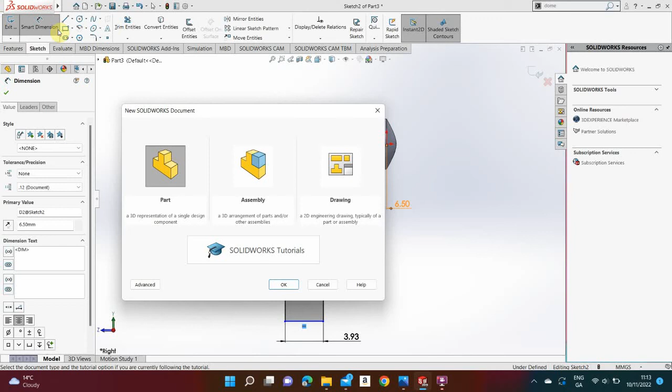Okay, so you're very welcome to this video. What we're going to be making here is the final few parts for the outside of the Newgate clock.

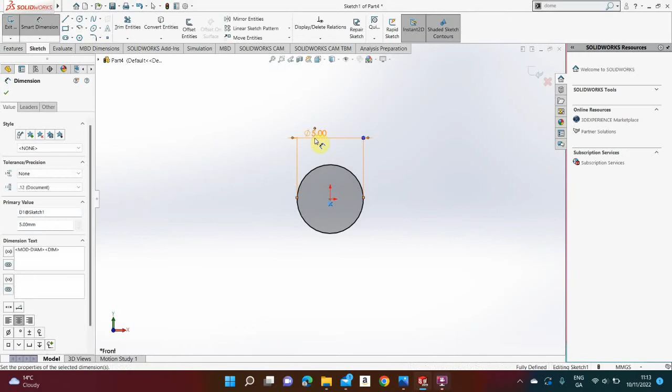I'm in a new part file here. I'm going to go to the front plane, right click front plane, click sketch, go to circle, click the origin, and draw a circle that is 5 millimeters in diameter. I go features, extrude boss base, and change it from 10 to 14.

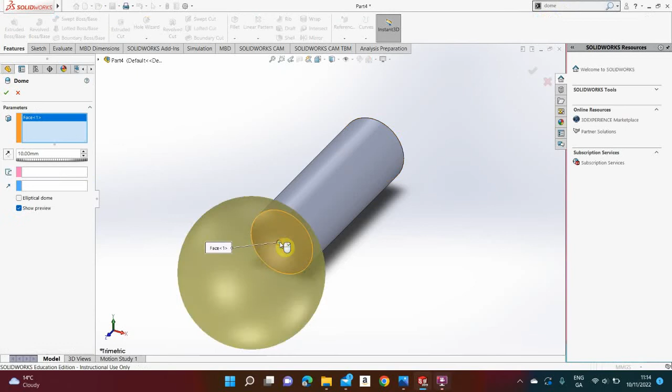So what we're making here is the hammer that hits the bells on the clock. I go to the drop down arrow at the top right, go to commands, type in dome, then click dome. I click this end here, that end there, and change from 10 to 2. That makes the hammer on the end, and I click the green tick.

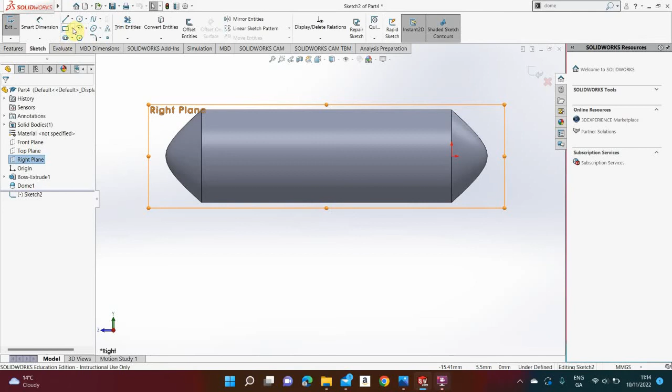Next thing to do is to make the spine that comes down from the hammer. I right click right plane, click sketch, hit the space bar, click normal to. I go to sketch, click the drop down arrow, go to corner rectangle, and draw it anywhere, I like on the left hand side. I smart dimension the width as 1 and the length as 22.

And we need to get this into the middle. So 14 take away 1 is 13, so it should be in at 6.5. Now I could be wrong with that, but there's a faster way of doing it.

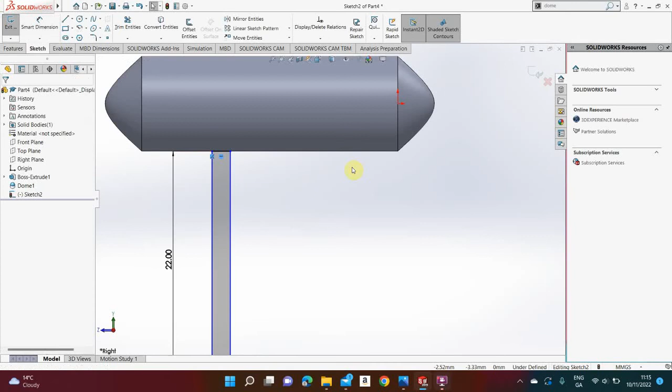I'm just going to push escape on my keyboard, right click this line here, so I'm going to pick up the center dot, and I should be able to move that by catching it and dragging it. There we go. Then I go to smart dimension, click the origin, click this line here, and we should have that at 6.5. Click the green tick. So it's in the middle.

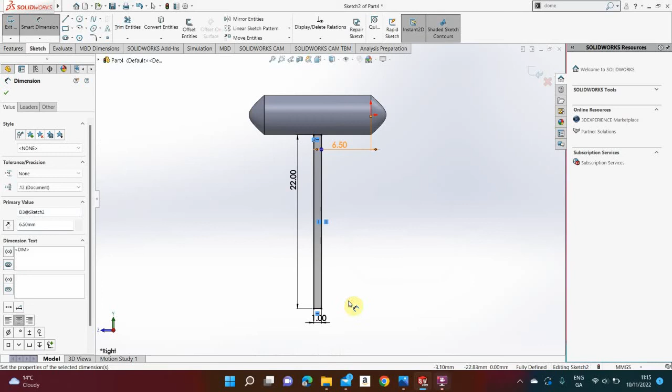I then go features, extrude boss base. Now that's going the wrong direction, so I change it from blind to mid plane, and change it from 14 to 5. Click the green tick again.

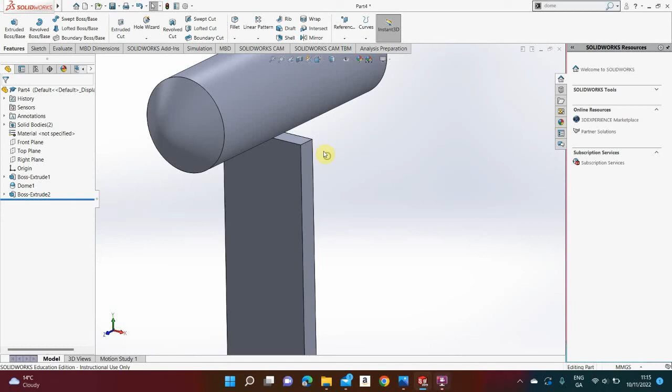And then the last step is we need to merge this onto this. So the easiest way to do that is right click here, click sketch, then click convert entities, then go features, extrude boss base, and we're not going to go up all the way, we're just going to go up exactly what's here, which is 5. Click the green tick once, click it again. And that is the hammer made for the Newgate clock.

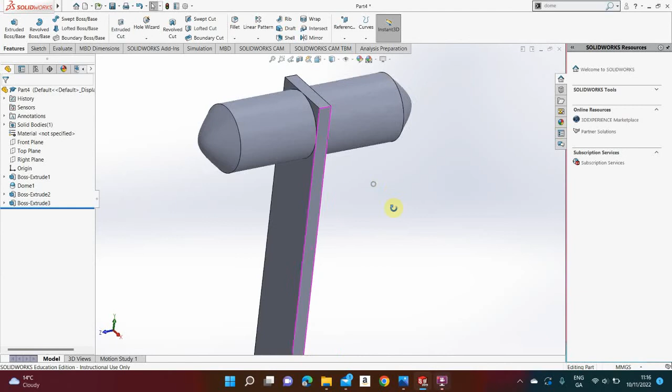There are 2 fillets on this here, so I'm just going to go to fillet, change from 10 down to 1. I'm going to click this edge here, and click this edge here. Still, it should be 1, not 11, sorry I typed it in wrong. There we go, and we're done.

Okay, so we can go straight away, file, save as. We're going to call that part 5 hammer Newgate. And again, go to your desktop, find your folder, and save it there.

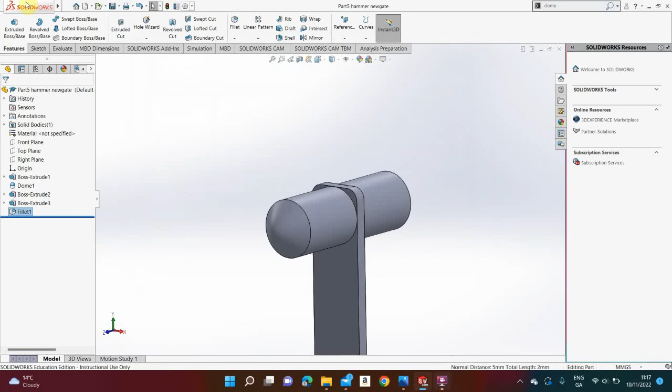Now, next thing to make on the same video, I'm going to make one of the bolts that holds the hammer to the handle, or holds the bell to the handle. So I'm going to go File, New, Part, OK.

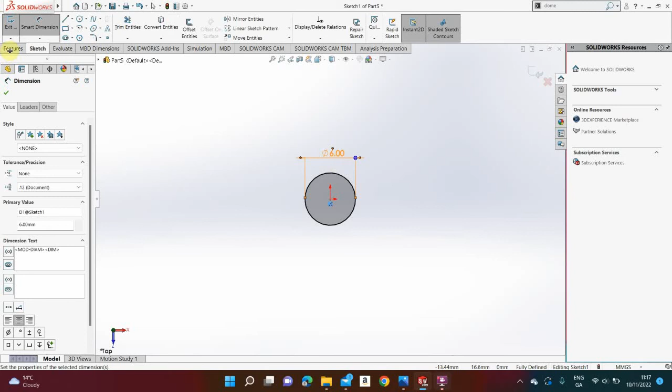This is a very simple make. It's going to go to the top plane, click Sketch, go to Circle, and draw a circle on the origin. I'm going to smart dimension that circle altogether as 6. And I'm going to go to features and extrude that up 5, so features, extrude boss base, and we change from 10 to 5.

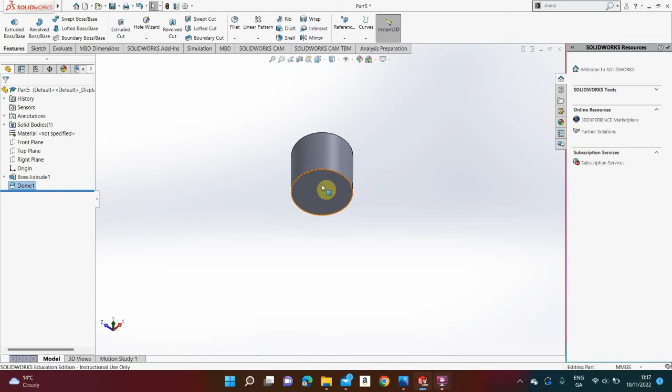Click the green tick. Again I click the drop down arrow, go to commands, type in the word dome, go to dome, change from 10 here to 1 this time, click the top of this, click the green tick. The last thing to do is on the bottom of this, I need to right click, sketch, space bar, click normal to, go to sketch, go to polygon. Make sure this says 6 on the left hand side, click the origin, drag out, just here outside the circle.

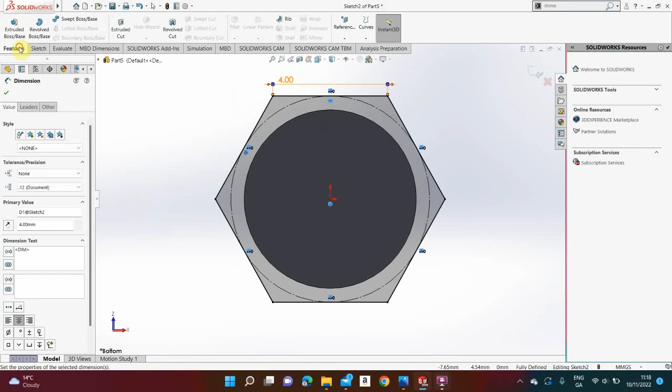We push escape on the keyboard, click this line, and tell it to be horizontal by clicking horizontal on the left hand side. Then go to Smart Dimension, click the same line again, and set that to 4. Then go to Features, Extrude Boss Base, and extrude that down a total distance of 1.

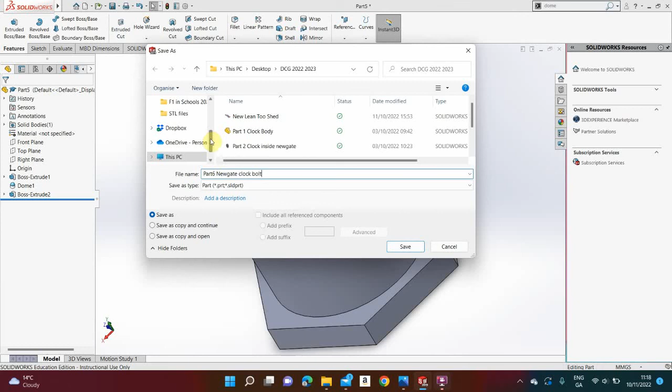That's that done. So I go File, Save As, Part 6, Newgate clock bolt, and again save that into the same folder, and click Save.

That bit is made. The final part to make in this video will be the legs, which are nice and simple to make as well. I go to File, New, Part, OK. I go to the front plane, right click front plane, click Sketch. I go to Polygon, make sure it says 6. Click the center here, draw a line out, push Escape on the keyboard.

I make sure I click horizontal on this top line. I go to Smart Dimension and set that to 4 again.

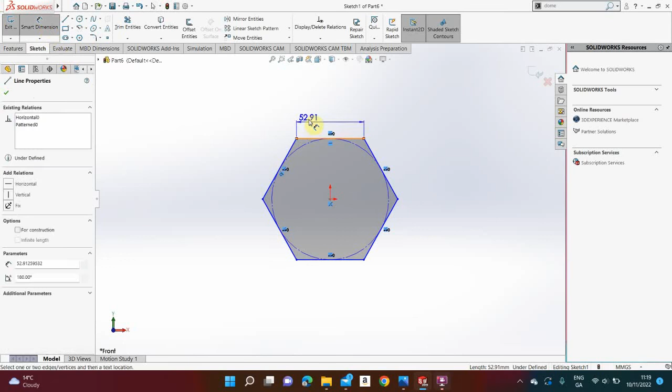Features, Extrude Boss Base, and we're going to extrude that a total distance of 10. It's already set to 10. I click the green tick.

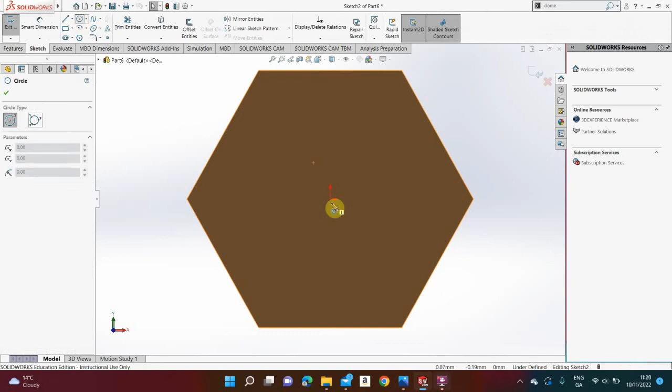Next, I right click anywhere on this face, go to Sketch, hit the space bar, click Normal To, go to Sketch. I go to Circle, click the origin, draw a circle, and Smart Dimension that circle to a total of 5.

I then go Features, Extrude Boss Base, and we're going to extrude that another 12, so I change 10 to 12.

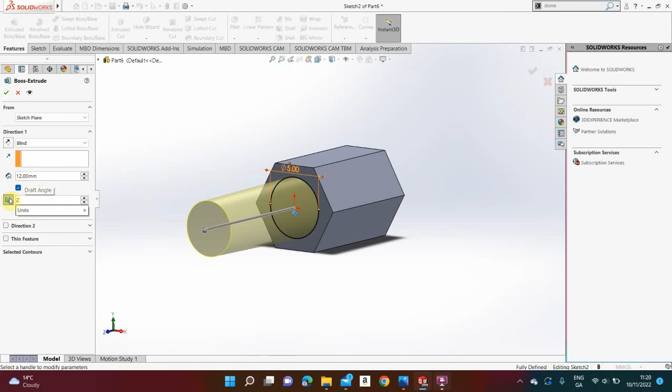That's that much, but there's a little bit of a problem - it's not straight like that. We have to click this button here called Draft, and we're going to draft it a total of 2 degrees. So click 2 in there, click green tick, click Yes.

Again, I go to Search, go to Commands, go to Dome, and click Dome. I click the end of this here. We don't want a dome of 10, we want a dome of 5. Have that done, click the green tick.

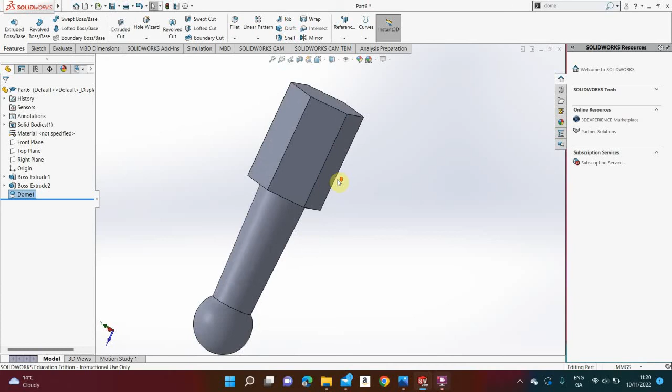And that is the leg made. One little thing to do though, to make it easier for assembly when it comes to attaching the leg later, is this up here - I'm going to right click on the top, go to Sketch, hit the space bar, click Normal To, go to Sketch, go to Circle, click the origin, draw a circle, and Smart Dimension.

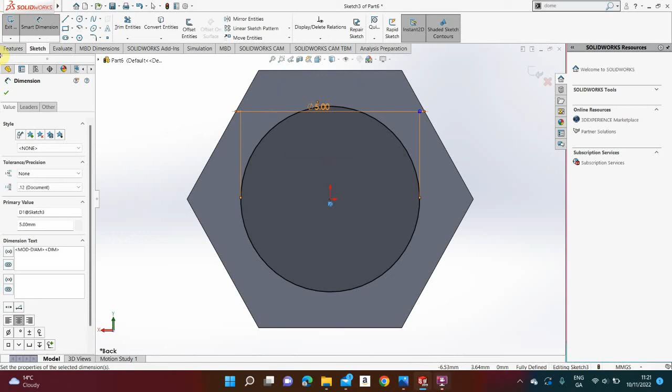That circle is a total of 5. Going to go to Features, Extrude Boss Base, and extrude that up there 10. And I click the green tick.

And then we're going to save that. File, Save As. I'm going to call that Part 7, Newgate clock leg. Find your correct folder, save it into your folder, and all these parts need to be saved into the folder, saved onto the USB key, and emailed to yourself for safekeeping.

The last part to make on this clock in the next video will be the clock face, the clock hands, etc. I'm not going to make them as separate parts because we've already gone into 7 parts for this clock as it is. So I'm just going to make the clock face, the second hand, the minute hand, and the hour hand all as one part, unless I feel it's easier to make them as separate parts. I'll make that decision in the next video.